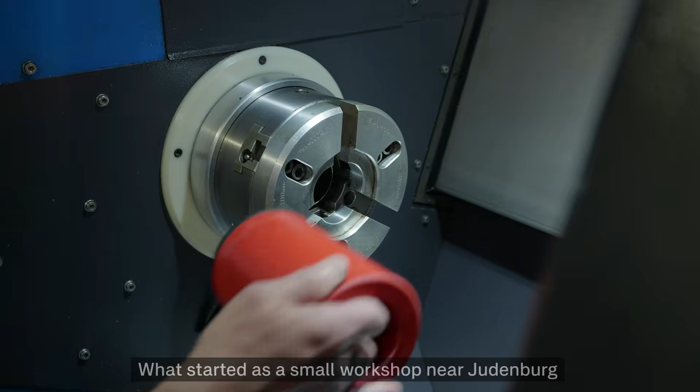When I first joined the world of seals, we didn't call it innovation. We simply wanted to make seals better, faster, closer to the customer, made with care. What started as a small workshop near Judenburg grew into a concept that changed the sealing industry. In the late 80s, we had an idea to machine seals directly from high-performance polyurethane tubes.

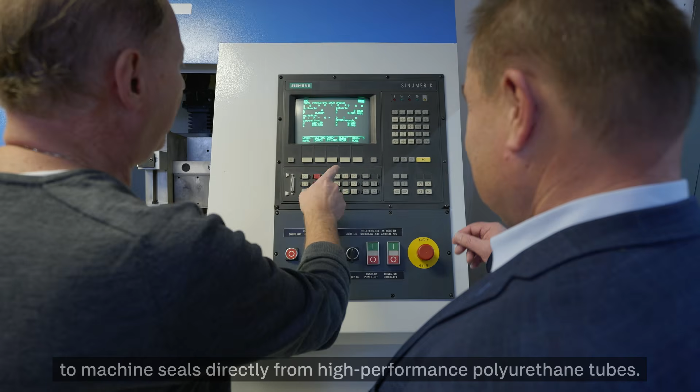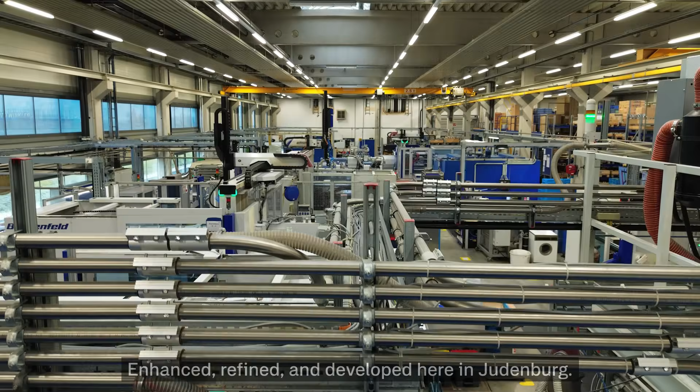It wasn't perfect. The early material looked like Swiss cheese. But each failure taught us something. Step by step, the concept was born. Today, decades later, the idea remains, enhanced, refined and developed here in Judenburg. From seals smaller than a coin to giants used across the world.

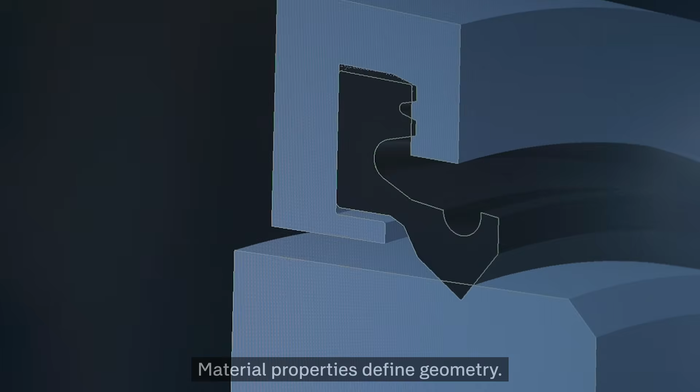We standardize thousands of sealing solutions and simulate their behavior before cutting a single millimeter of material. Contact forces, pressure curves, deformation profiles. We see many insights in advance. Material properties define geometry. Testing defines limits.

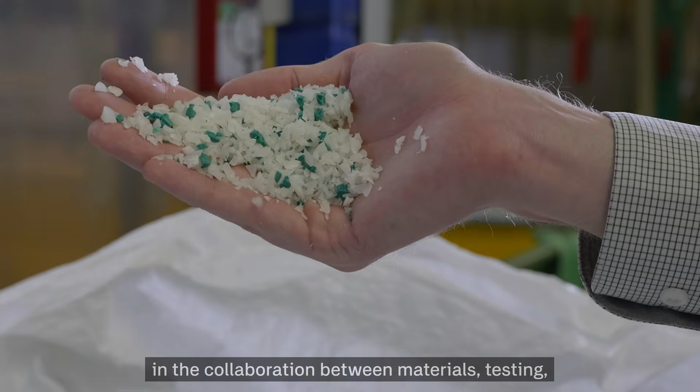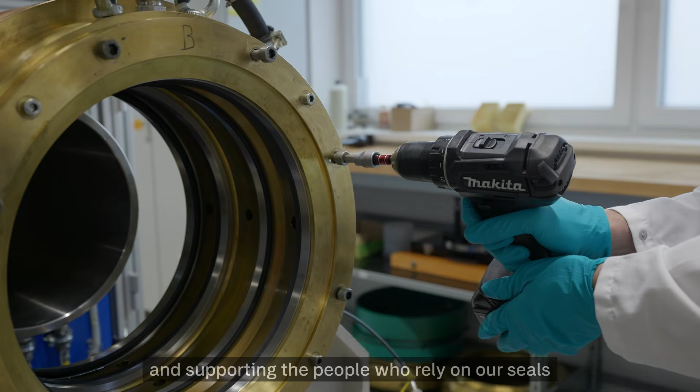Engineering creates the balance. This is where precision is born, in the collaboration between materials, testing, digital engineering and experience. Curiosity drives our work. It inspires us to shape ideas with care, supporting the people who rely on our seals and finding the right solution to every challenge.

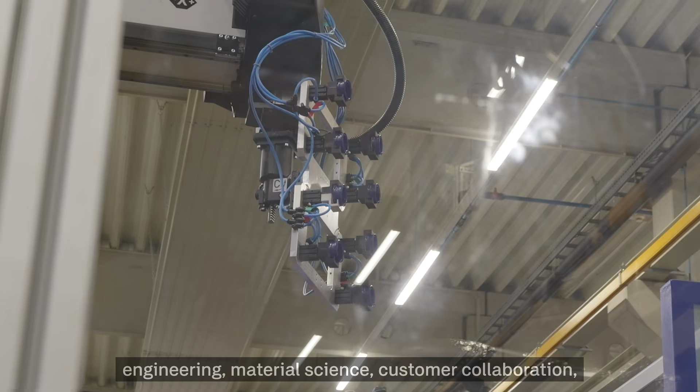People often think the machined seal is a product. It is not. The seal we provide is only the visible part. The real value is everything behind it. Engineering, material science, customer collaboration, local production, technology, and the expertise to solve problems fast.

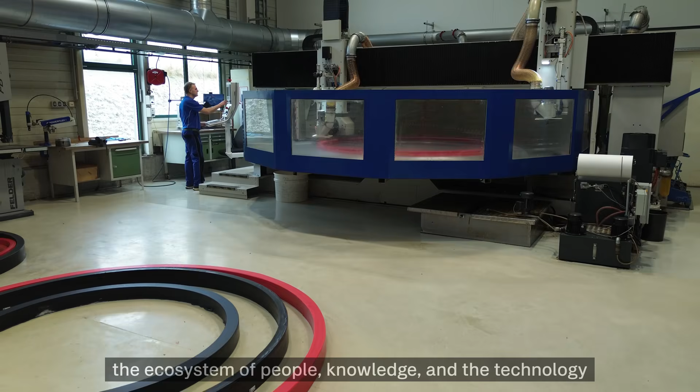Competitors can copy a geometry. What they can't copy is the synergy, the ecosystem of people, knowledge, and the technology that makes SKF unique. The main difference between our competitors and us is the passion to create sealing solutions. We do not simply manufacture seals. We deliver reliability, safety, and confidence for critical operations.

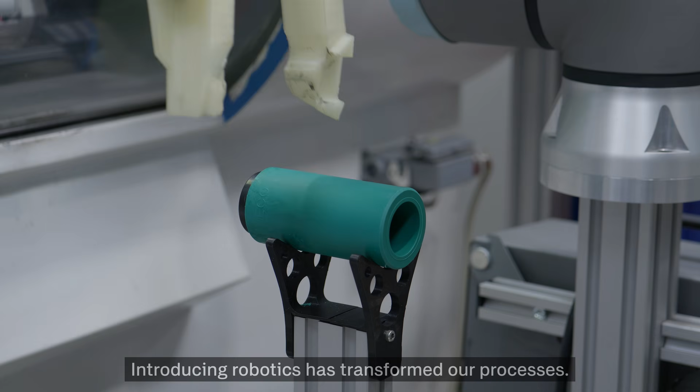Our team is highly skilled. They handle complex engineering challenges and design changes, adapt quickly, and keep accuracy non-negotiable. Introducing robotics has transformed our processes. More precision, more consistency, shorter cycle times, and more time for our people to focus on critical tasks.

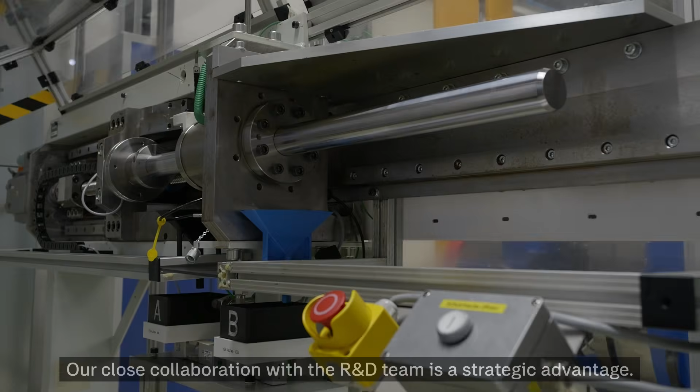Our close collaboration with the R&D team is a strategic advantage. When material properties and/or design requirements need to be changed, we adapt immediately. No delays, no compromises. Behind every order, there is a person, a need, a story. Our customers trust us because we listen and because we deliver what truly fits their reality.

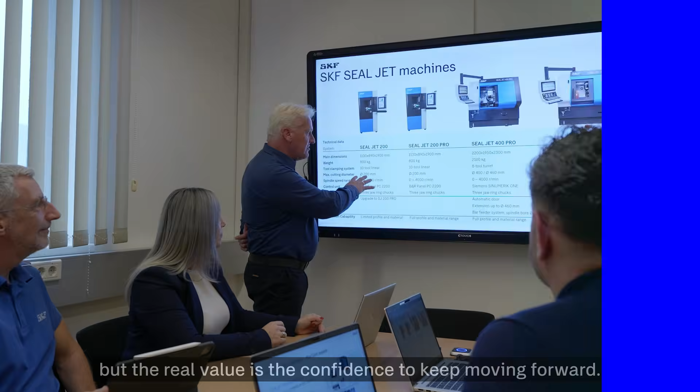Speed matters, but clarity, transparency, and care matter even more. A seal is the final product, but the real value is the confidence to keep moving forward. This is where precision meets responsibility.

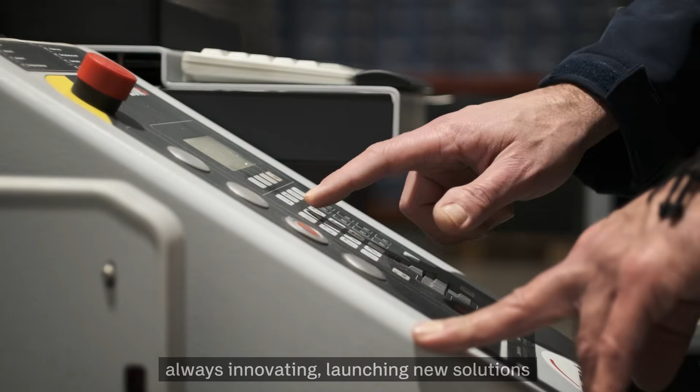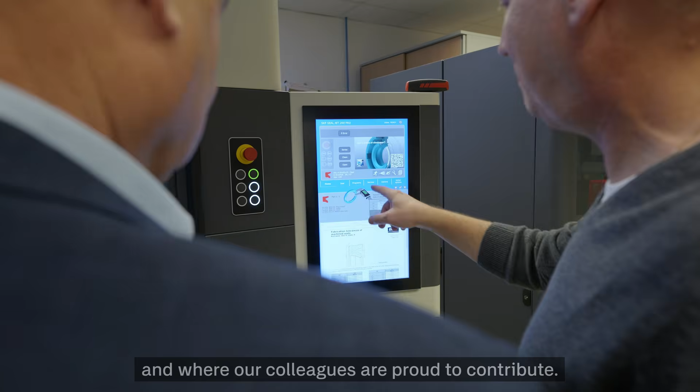This is the community behind Machined Seals, a global ecosystem, connected and committed. From the chemical recipe of our polyurethane to the moment when a seal solves a customer challenge. This is not just about growing the business. It's about creating a place where customers want to work with us and where our colleagues are proud to contribute.

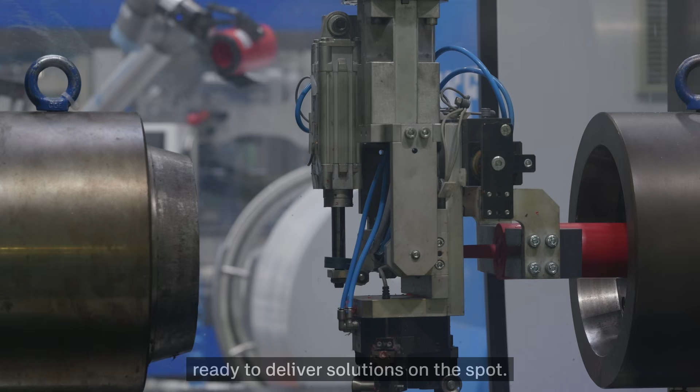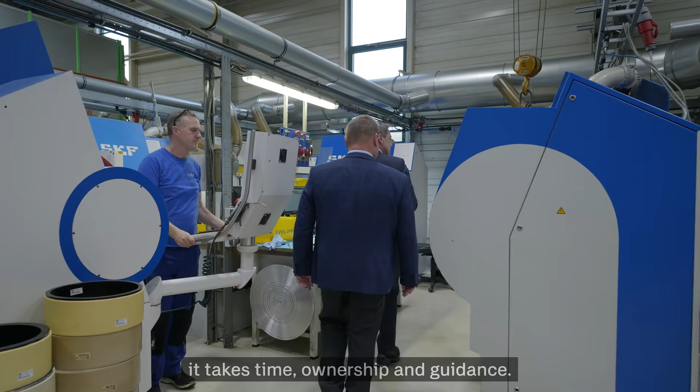Digitalization is the cornerstone, a simpler, faster value chain, a global engineering network supported by digital tools, ready to deliver solutions on the spot. Collaboration, care, and courage are the engine of innovation. Because knowledge is not handed over in a week. It takes time, ownership, and guidance.

This is what makes SKF Machined Seals different. We innovate to remove friction, keep your application moving, and let you focus on one thing only: progress.